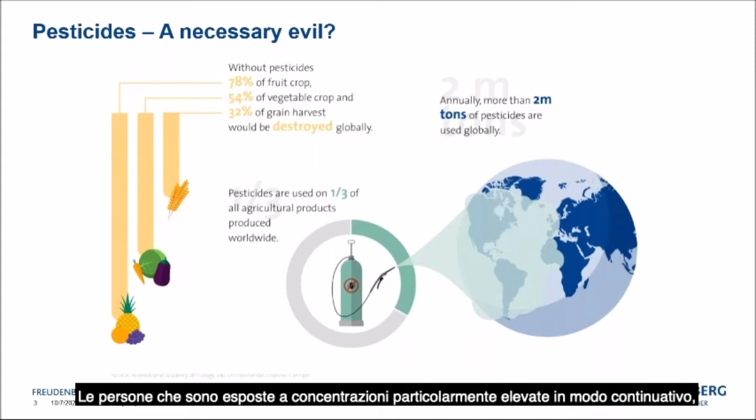But along with these benefits, pesticides also have drawbacks. For example, based on actual studies, a potential toxicity to humans and other species is expected. People that are exposed to especially high concentrations in the long term have to be protected before getting potential diseases. One example is the farmer during the spraying application, who has the risk of exposure to very high concentrations.

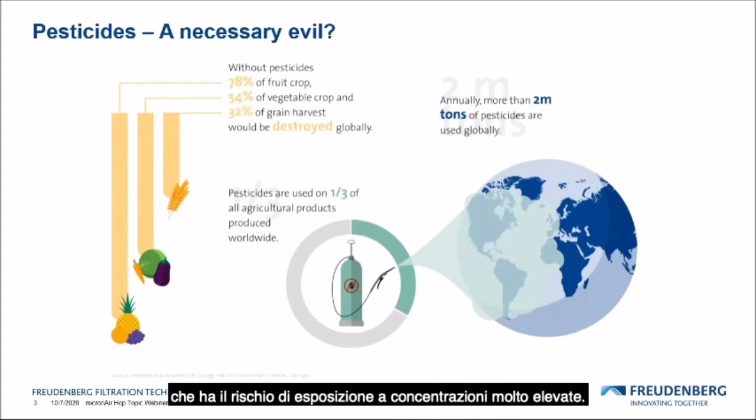And this is now the point when we come to the EN 15695. The purpose of the EN 15695 is to limit the exposure of the operator, in fact the driver, to hazardous substances when applying plant protection products, so-called PPPs, and liquid fertilizers.

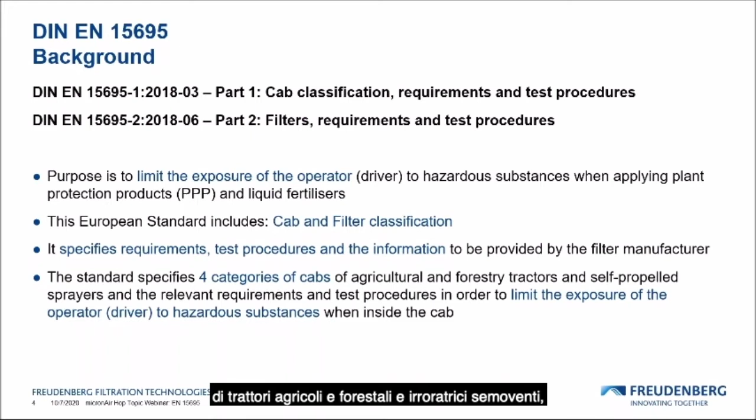The standard is divided into two parts. The first part is about cab classification and requirements and test procedures. The second part is about filters, test procedures, and information to be provided by the filter manufacturer. The standard specifies four categories of cabs for agricultural and forestry tractors and self-propelled sprayers, and the relevant requirements and test procedures in order to limit the exposure of the operator to hazardous substances when inside a cab.

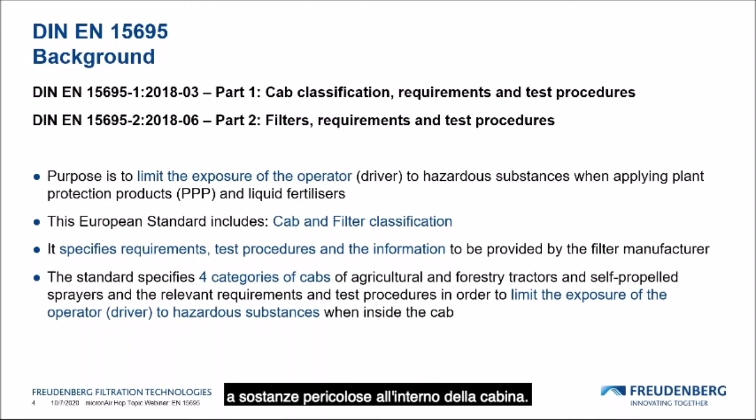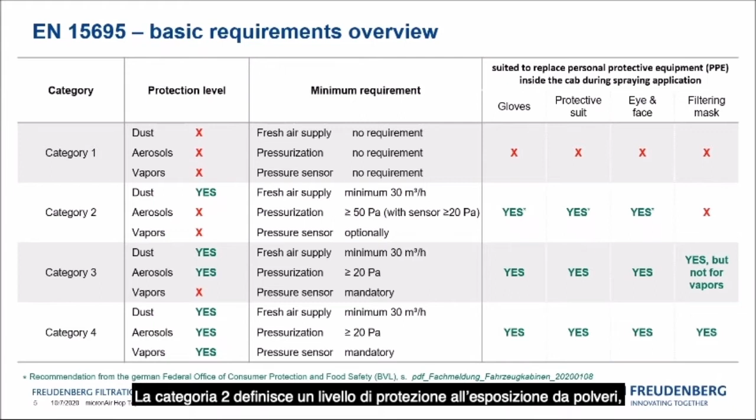Category 2 is defining a protection level against dust exposure, so a dust filter here is needed. It also defines a minimum fresh air flow of 30 cubic meters per hour and a pressurization of the cab to more than 50 Pascal, or if the cab is equipped with a pressure sensor, optionally, a minimum of 20 Pascal overpressure. In a spraying application, a cab category 2 is suited to replace the gloves, the protective suit, the eye and face protection, but not the filtering mask.

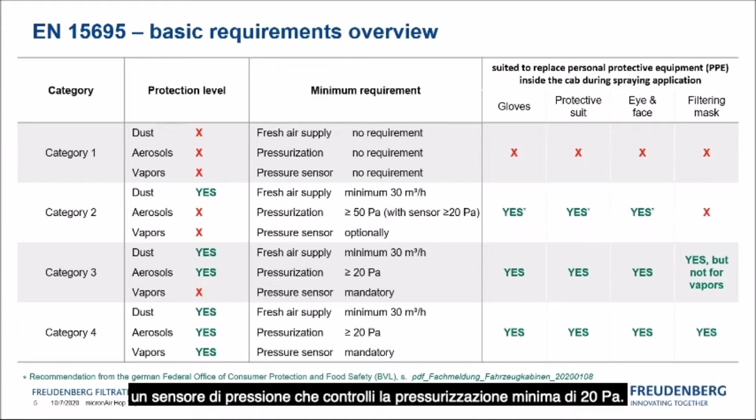Category 3, additionally to the dust protection, has to offer protection against aerosols. So the filter performance is increased, and also on the cab it is now mandatory to have a pressure sensor controlling the minimum pressurization of 20 Pascal. This cab level is also suited to replace the filtering mask as PPE when you are inside the cab during a spraying application. But please note, only if you are not exposed to vapors.

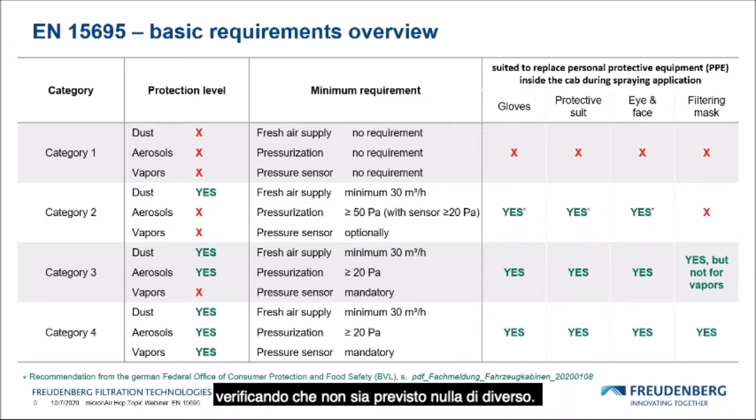If gas-tight respiratory protective equipment is needed, the cab category 4 is suited to replace the PPEs during the application—for sure, depending on the material data sheet of the PPP and taking care that nothing different is mentioned there. Additionally to the requirements of category 3, here also a filter performance for vapors is defined. But please note, during all other activities outside of the cabin, the personal protective equipment must be worn. In order to avoid contamination of the cabin, it is not permitted to enter the cabin with contaminated personal protective equipment.

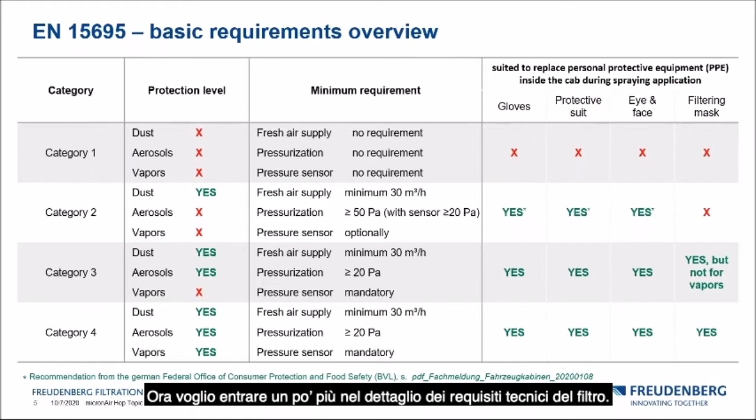So now I want to go a bit more into detail about the filter technical requirements. As the category 4 filter has to fulfill the dust, aerosol, and also the vapor purification requirements, I want to take a category 4 filter with its multi-stage design as an example, because we touch all the mentioned points.

So on the first stage, for the dust filters, the requirements on performance are: the filter has to offer more than 99% gravimetric efficiency at the maximum possible fresh airflow. The test has to be done with A2 dust in a raw gas concentration of 1 gram per cubic meter, and the test duration is 30 minutes.

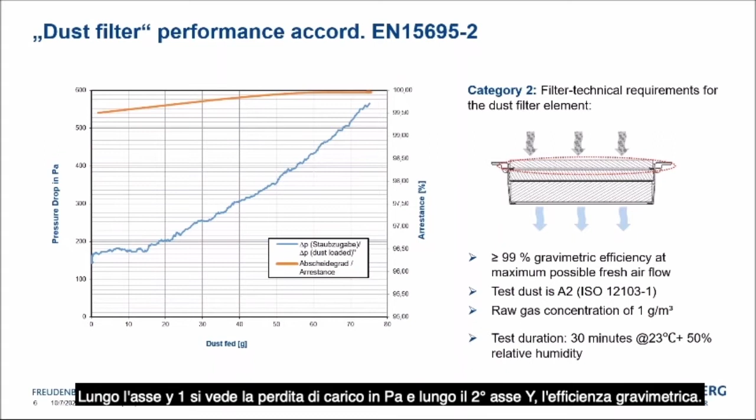And here on this graph, you can see as an example the performance of the category 2 filter stage during this test. Plotted against the first y-axis, you see the pressure drop in Pascal, and against the second y-axis, the gravimetrical efficiency. On the x-axis, you see the dust load.

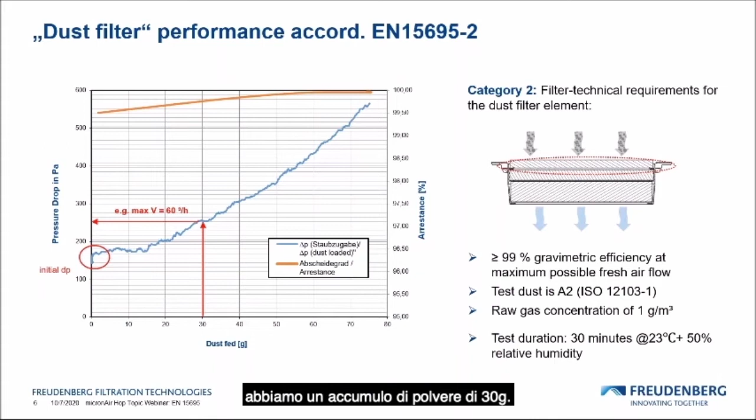When we have zero dust load, the dP we find is our initial delta P at the maximum flow rate. With increasing dust fed, the pressure drop is also increasing, for example until a final dust load is achieved. This depends on the maximum airflow. For example, for 60 cubic meters per hour, under these test parameters, this corresponds to a dust load of 30 grams. The efficiency also is increasing with dust load if we look at the category 2 stage separately.

The average has to be more than 99%.

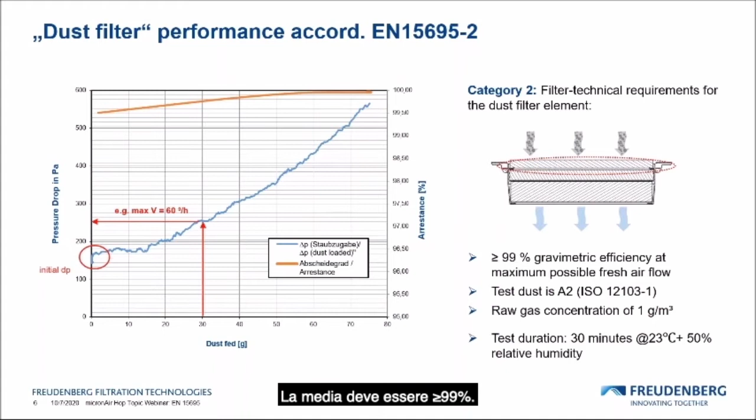On this slide, I wanted to share some impressions from real operation. To be more precise, here you can see the dust filter stage of a category 4 filter element that was operated in a vineyard and orchard for some 150 operation hours. I always say it this way: the job of the dust filter stage is to do the hard work and get rid of the biggest dust portion. Looking at the pictures, you find a lot of coarse particles and fibrous dust.

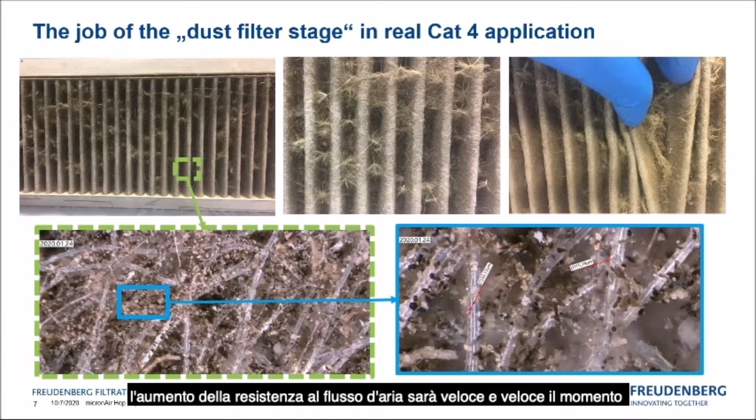To have good usage of the filter area, it helps to go for a quite open pleating and allow the coarse and fibrous dust to penetrate into the pleat depths. Then you can ensure the filter operates a long time at a low delta P level. If you start to clog the pleat tips, the increase of airflow resistance will happen very fast, and therefore it comes to the point when the fan cannot handle the minimum airflow requirements anymore.

Beside the fact of dust filtration, in a spraying application, the filter material itself also needs to handle the spraying fog and droplets being created. That's why our experience is that a progressive, structured, water-resistant non-woven material offers also very good coalescing characteristics, and therefore the best performance to do the job.

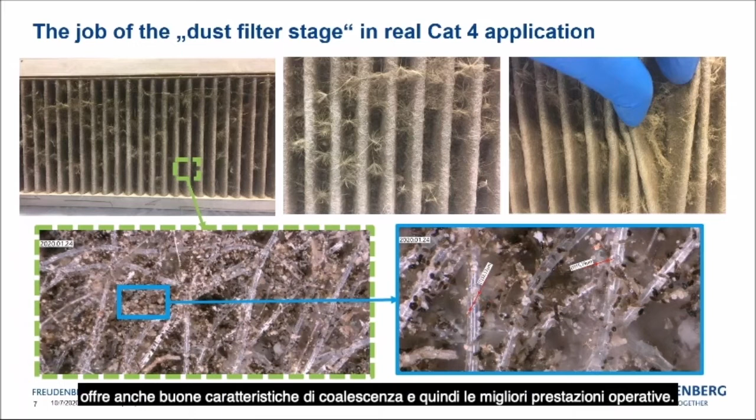In a category 4 configuration, we have, behind the dust filter, our workhorse, the aerosol filter sitting. The job of the aerosol filter is to guarantee the high filtration performance.

The requirements basically are the same as for a filter element being installed in a clean room or in a hospital. So the filter has to be qualified according to EN 1822. The maximum aerosol penetration shall be less than 0.05% before and after storage. This corresponds to a filter efficiency of 99.95% for MPPS particles. In cleanroom industry, this performance level is well known as H13 filter class.

The test duration before storage is some 20 minutes, and then we store the filter for 24 hours and repeat the test for another 3 minutes. Repeating the test also after storage is not typical for cleanroom filters. But in our case, on the tractor, it shall simulate the resistance of the filter material when exposed to high aerosol concentrations and check if there is any clogging effect.

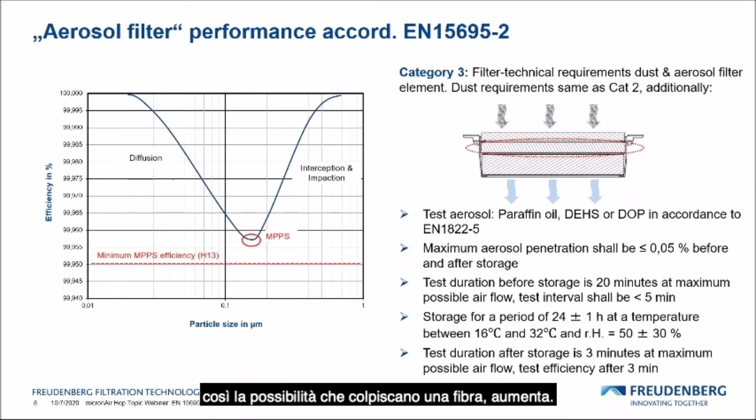This effect is very strong for particles, especially in the nano range, because they recognize that air is not a continuum, it consists of single molecules, and their motion is a random walk, known as Brownian molecular motion. As particles get finer, they follow this motion, so the possibility to hit a fiber increases. Anytime I explain this background, it sounds fascinating for myself.

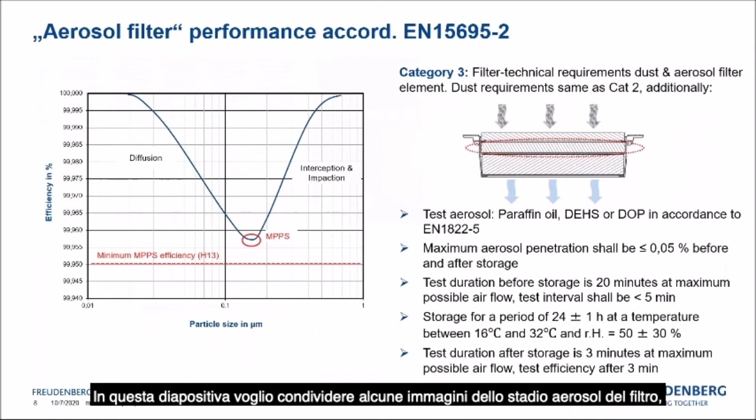The question now is: is more really needed? Looking at the aerosol filter, we also see that some dust, especially in the submicron and nano range, penetrated the dust filter and got collected on the aerosol stage.

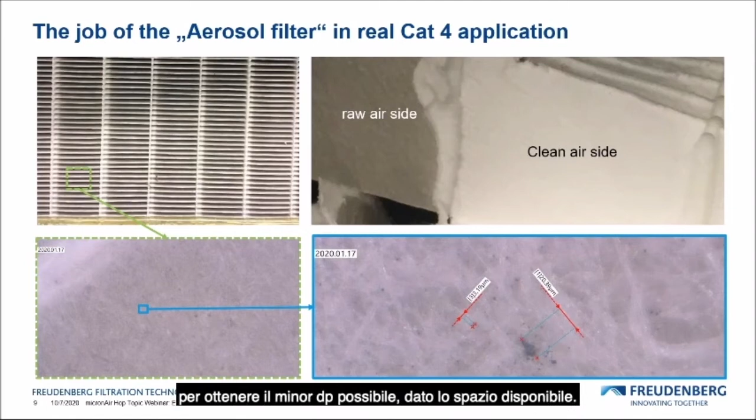The filter has to meet the requirements of type A. This means for a test duration of 70 minutes, cyclohexane is applied in a raw gas concentration of 500 ppm, and the clean air concentration has to stay below 10 ppm over the complete test procedure.

For sure, to guarantee the best driver's protection level, this test also has to be done at the maximum possible airflow. On this slide, you can see the vapor filter stage after the field test.

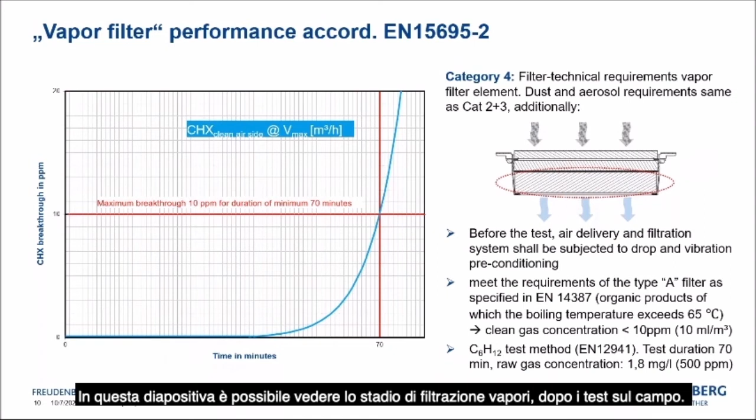To handle the requirements, in this case, as an example, we are using a special ceramic carbon mixture where, during a sintering process, robust and stable blocks are created.

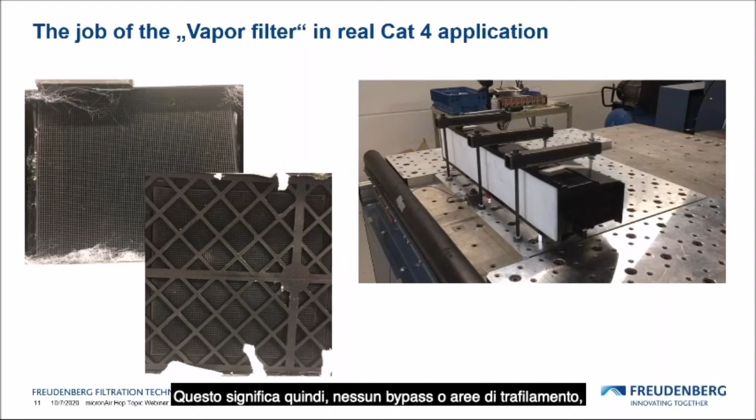As it is vapor being collected outside in the field, inside this carbon porous structure, visually it is not very spectacular to analyze. But an important finding is that these blocks resist the operating conditions. No cracks or mechanical degradation could be found, which means at the end no bypass or leakage that would increase the risk of exposure of the driver to hazardous substances.

I also uploaded a short video sequence where the vibration preconditioning of the filter is done. This is the test the filter has to survive, and the vapor performance of the filter is tested afterwards. I hope this video works.

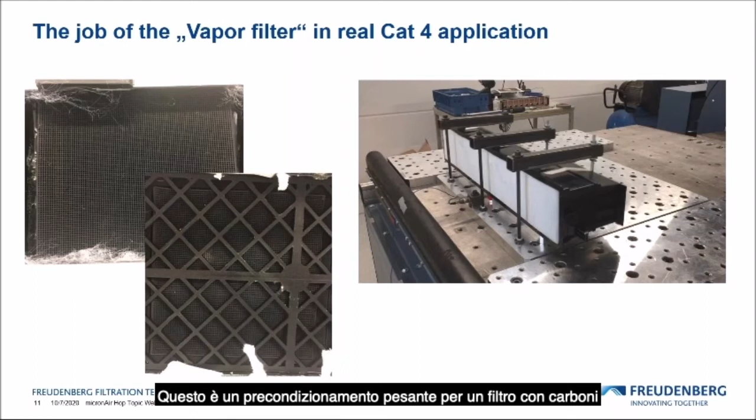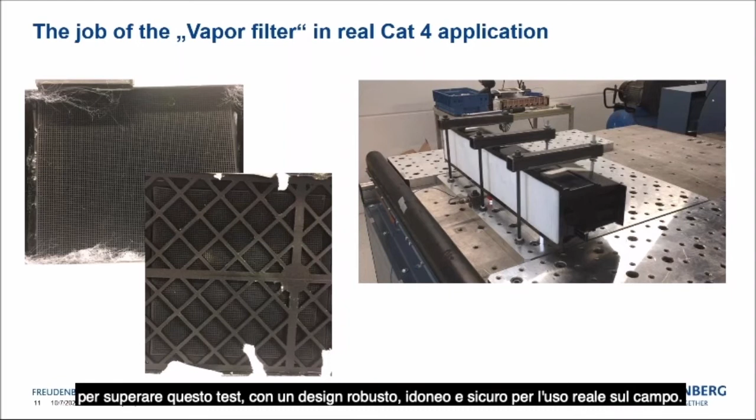As you see, it was also a very heavy preconditioning for a carbon filter. You can imagine, if you want to survive this kind of test, you need a special solution and a robust filter design to ensure, at the end of the day, a safe operation outside in the field.

The filter technical requirements are now clear. The challenge is to design a filter element in a way that all these characteristics are ensured and fulfilled. A multi-stage design is needed to handle these various requirements, with different jobs clearly identified and dedicated to each filter stage: a filter for the hard work in the first stage, a filter to guarantee the highest air purification in the second stage, and a robust vapor filter as the final stage. All this is needed to fulfill the category 4 filter performance.

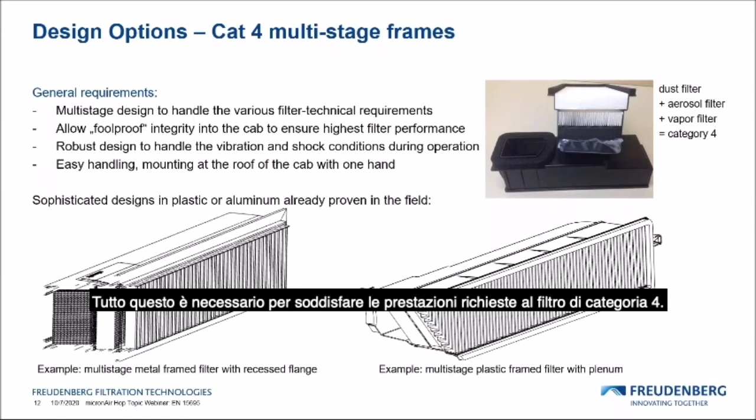Here on the picture to the right, you can see the principle on a mock-up. Everyone who has installed a filter into a clean room and performed the integrity test knows it's sometimes not easy, and you need experience to install a filter element really leak-free into the housing. Since we cannot expect people installing filters into a tractor cabin to have the same experience as cleanroom people, we need a frame design that allows foolproof integrity of the filter element into the cab to ensure the highest filter performance.

A robust design is needed, as we have seen on the video, and typically a requirement is also the possibility of easy handling, so that mounting at the roof of the cab with one hand can be feasible.

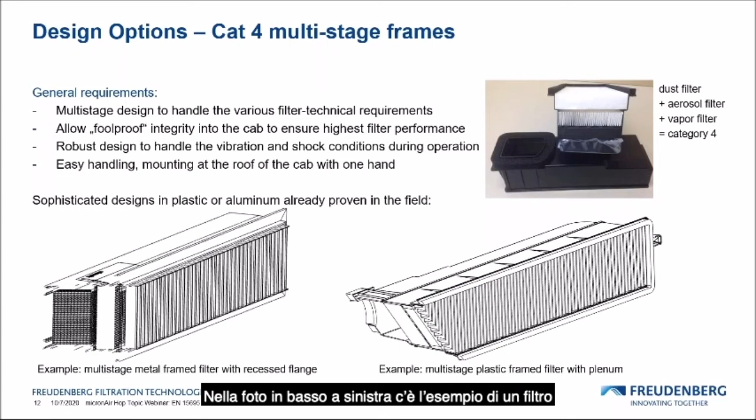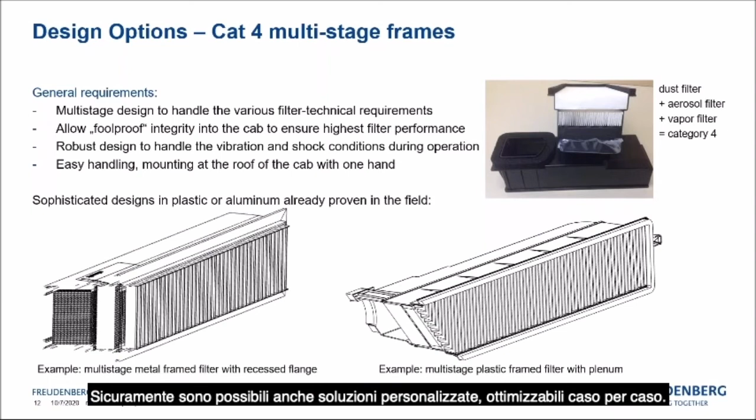In the picture below on the left side, I made an example of a multi-stage metal framed filter with a recessed flange. I like this recessed flange concept very much because it allows maximum usage of the available space inside the cab. On the right side below, there's a sketch of a multi-stage plastic framed filter with plenum. That can, from a design point of view, also have some benefits, especially concerning the leak-free integrity of the filter element into the HVAC system. For sure, custom solutions are possible and can be individually optimized.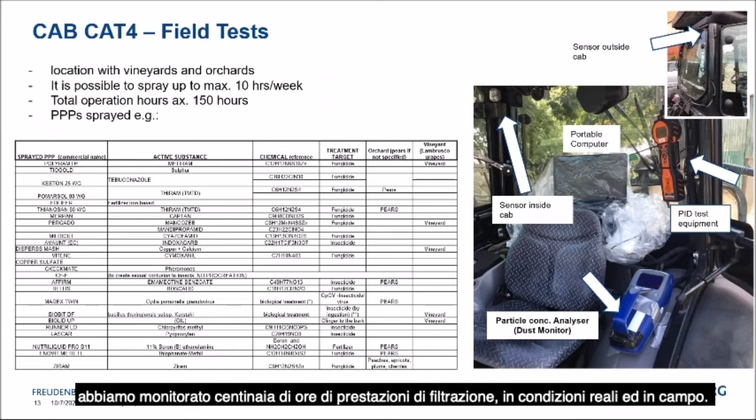From the early beginning up to today, we monitored several hundreds of hours of filter performance outside in the field. I would say we now have experience with more than approximately 50 different PPPs.

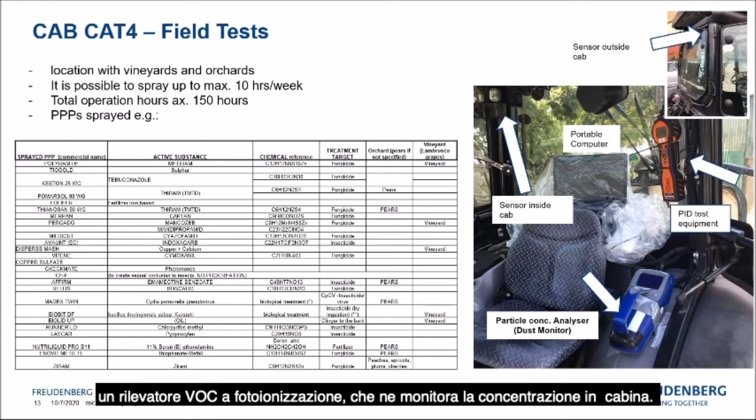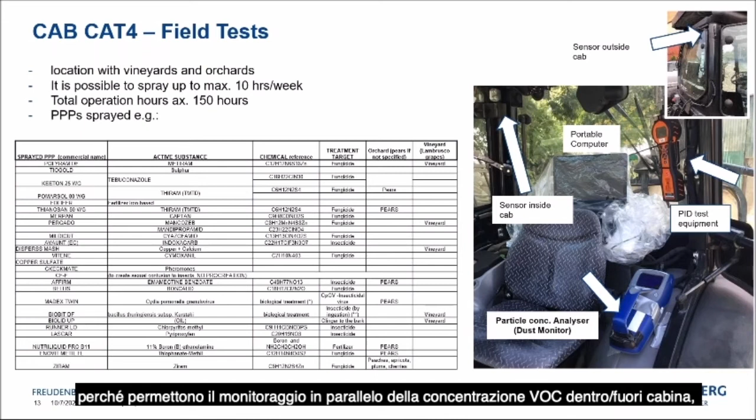On the picture to the right, you can see a view inside the cab and the test setup. You can find a dust monitor detecting the dust concentration. The orange device here is a PID, a photoionization detector, monitoring the VOC concentration inside the cab. Quite interesting to use are also electronic VOC sensors that are actually under study, because with this it's possible to monitor the VOC concentration inside and outside the cab in parallel, giving a direct link to the protection level of the driver.

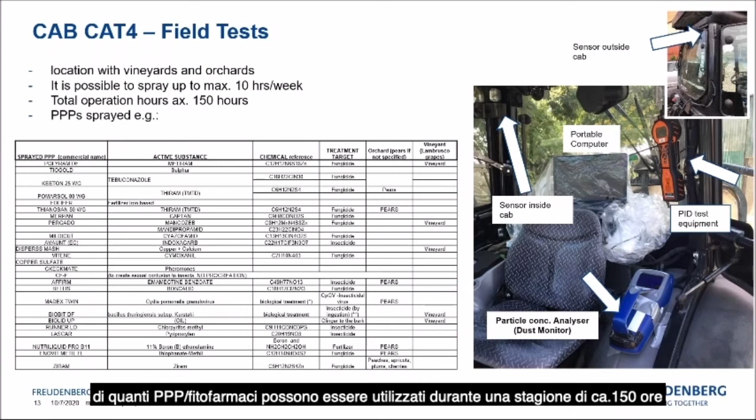I will not go into details of the table shown here, but just as an example, I want to give you a feeling of how many different PPPs can be applied during one spraying season of 150 hours in a mid-sized vineyard and orchard. Okay, here I just want to give you a short impression from running field tests.

First of all, I have to say, for a filter technician, there are much worse places to run a field test. And when you are outside, you quickly understand what happens in reality during the spraying application. For interpretation of the results you monitor, you have to be aware of situations that are most critical for exposure to hazardous substances, like the ice stone protection shown in the picture below to the left, which can create a PPP tunnel, or on the right side, the moment when you make a U-turn and drive probably directly through the cloud you applied before.

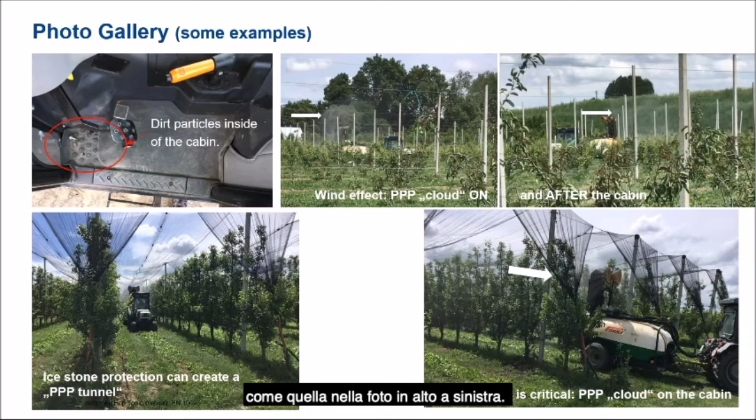Also, weather conditions like the direction of the wind have a big impact, as you can see in the two pictures here at the top. And also the contamination source can be dust carried inside the cab by the driver, as you see in the picture above. Here you can find some results created from the dust monitor.

Let me explain. For the first 20 minutes, the dust monitor was located inside the cab. And to get a feeling of what is going on outside the cab, we then took it out and checked the outside concentration level.

Inside of the cab, the dust concentration we monitored is quite low, in the low microgram per cubic meter range. There are two peaks visible linked to special moments. The first is when we were standing at a PPP filling station and the farmer opened the door. The second was when the driver stopped next to me asking if the device that turned into screensaver mode was still active.

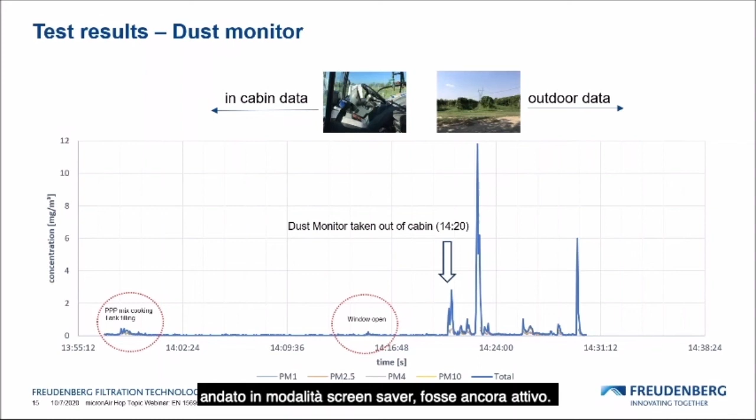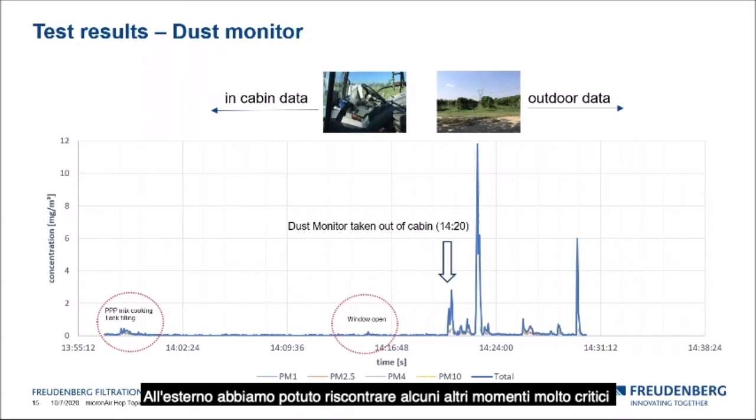Immediately you recognize the open window on the dust monitor. Outside, we could find some very critical moments linked to the U-turns of the tractor. Here the peaks are in the milligram per cubic meter range, and the highest one we found was close to 12 milligrams per cubic meter.

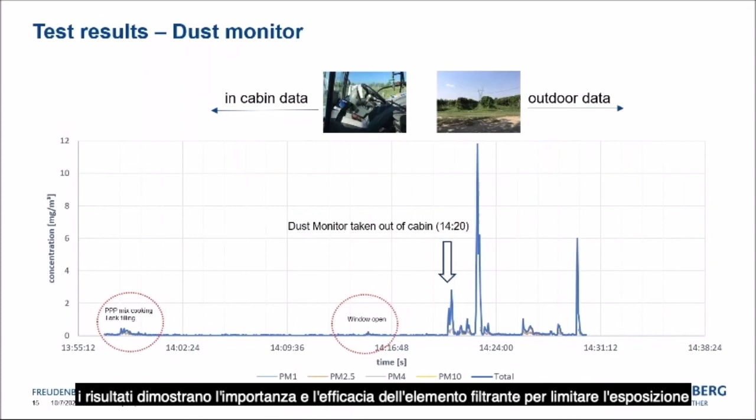As during the complete test, the concentration inside of the cab was only in the microgram per cubic meter range, these results prove for me the importance and effectiveness of the filter element to limit the exposure of hazardous substances to the operator. On this slide, I want to share with you some results generated by the VOC sensor.

As mentioned before, the interesting thing is that we can monitor inside and outside concentration in parallel. What we found in running the PID in parallel is that the values inside of the cab are in the ppb range, parts per billion. We didn't find a moment up to now where we raised really into the ppm, parts per million range inside of the cab, which is by factor 1000 higher.

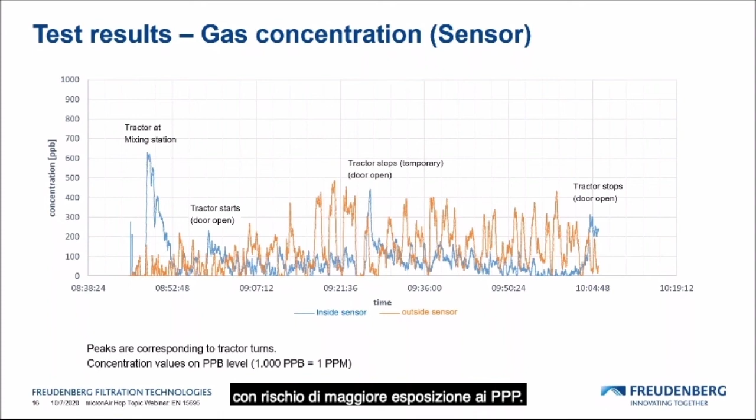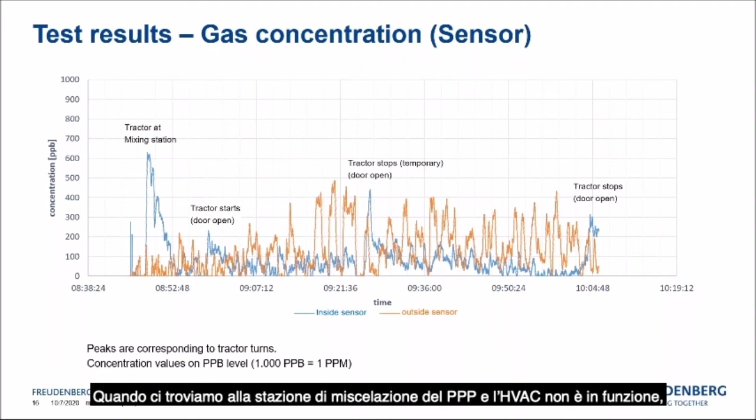Similar to the dust concentration inside of the cab, there are some special moments with the risk of higher exposure to VOCs. The blue line here is the signal of the inside sensor, and the orange one from the outside sensor. At the moment at the PPP mixing station, when the HVAC was not running, we find an increase of the inside concentration. After the HVAC started, also in the moment the door was opened, we had inside a higher level than outside. This happened anytime we stopped and opened the window or the door for a short moment.

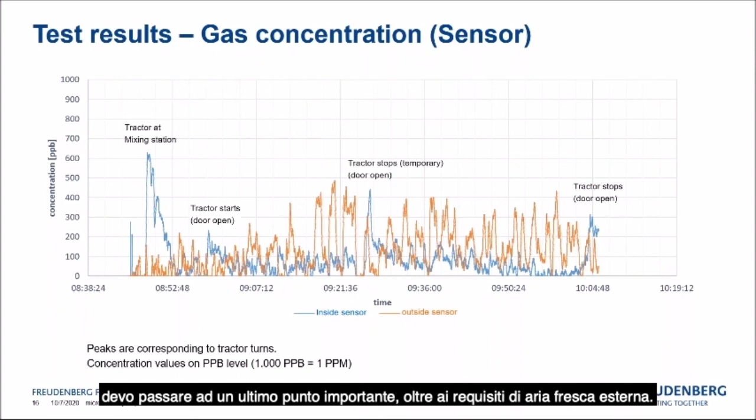For sure, during all our tests, we found several interesting moments. But as time on this webinar is limited, I want to come to a last point beside all the requirements for the fresh air filter, for the fresh air supply. This is the importance of also using a recirculation air filter.

To achieve an air quality in the driver's comfort range, the air conditioning, for example cooling, heating, is done with a higher recirculation airflow, let's say up to 500 or 600 or 700 cubic meters per hour, and a lower fresh air flow, for example 43 cubic meters per hour. This is lower because the fresh air is contaminated. And to get rid of these particles carried inside the cab, the fresh air filter cannot help.

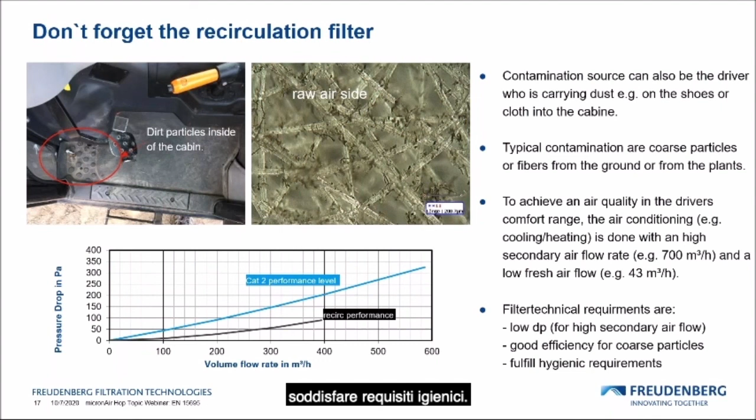Here the recirculation filter is needed. The filter technical requirements are a low delta P, a good efficiency for coarse particles, and it has to fulfill the hygienic requirements.

Finally, we are quite close to the end of this webinar. I want to give you a short summary. What was it about? The standard EN 15695 specifies 4 categories of cabs of agricultural and forestry tractors and self-propelled sprayers in order to limit the exposure of the operator to hazardous substances when inside of the cab.

Why is it important? To protect the health of the driver and to limit the exposure of the operator to hazardous substances. Cabs category 4, according to EN 15695, are suited to replace personal protective equipment during the application.

And how is it done? The CAT4 multi-stage filter concept reliably separates dusts, aerosols, and vapor contaminants. It offers more than 99% gravimetric efficiency and has a maximum MPPS penetration of 0.05%. And it meets the requirements of a type A filter.